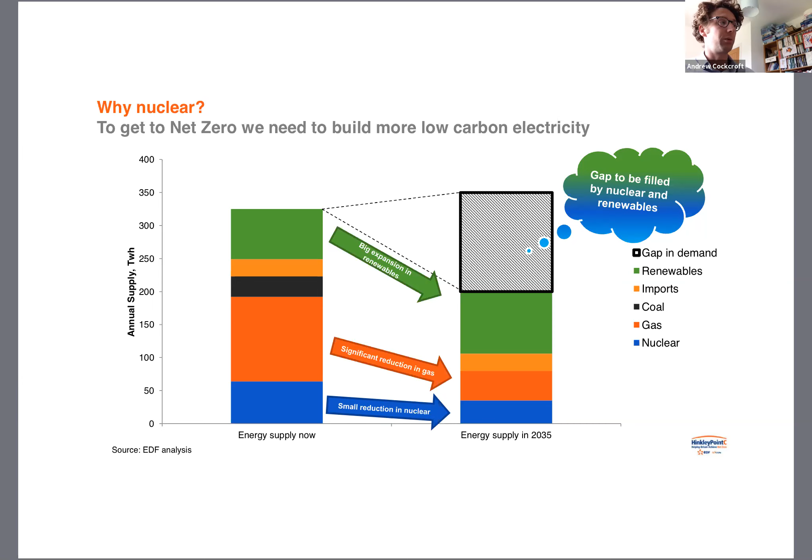So Howard, if you could just jump to the next slide for me, please, just to give you the basic grounding of Hinkley Point C before we get into the detail.

Hinkley Point C is the first of a set of planned new nuclear power stations for the UK. For us as EDF, we have Hinkley Point C down in Somerset under construction. We're also working with government on proposals for Sizewell C in Suffolk, and also working with our partners CGN to develop an additional station over in Bradwell.

Hinkley Point C in isolation, once operational in 2025, will provide energy for 7% of the UK, which can translate down to around 6 million homes. So a substantial amount, and thinking back to that first graph we looked at, nuclear can meet that future energy demand.

We'll get onto this in slightly more detail further down the presentation, but especially in today's context, and for those of you in the construction and engineering sector, the value of major infrastructure projects, particularly these mega projects, and the value that they can provide to the UK economy, and also to people's skills development and jobs creation, shouldn't be underestimated.

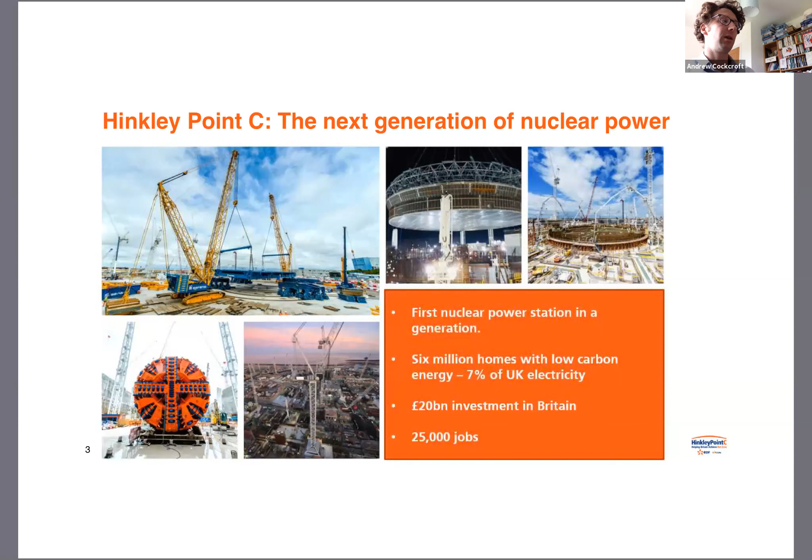Okay, so Howard, if you've just gone to slide 4, please. This is something we often talk about, Hinkley Point C, as just a generic power station, but I think it's often good to really understand what it is.

Hinkley Point C is what you'll hear termed an EPR reactor—that's almost like its brand name. There are various connotations, but you can think of that EPR acronym standing for either European or evolutionary pressurized water reactor. European because it is a European design, and evolutionary because it's not a new design, which I think is an important point to make.

The EPR design that we're building at Hinkley Point C is not fundamentally new. It's built from hundreds and thousands of reactor years of operation across other European designs, and what it does is build upon those—taking the best efficiency measures from some, the best safety measures from others, and building it together to create the Hinkley Point C EPR, or UK EPR as it's now known. Fundamentally, the EPR reactor is more efficient than previous designs, so it uses less uranium.

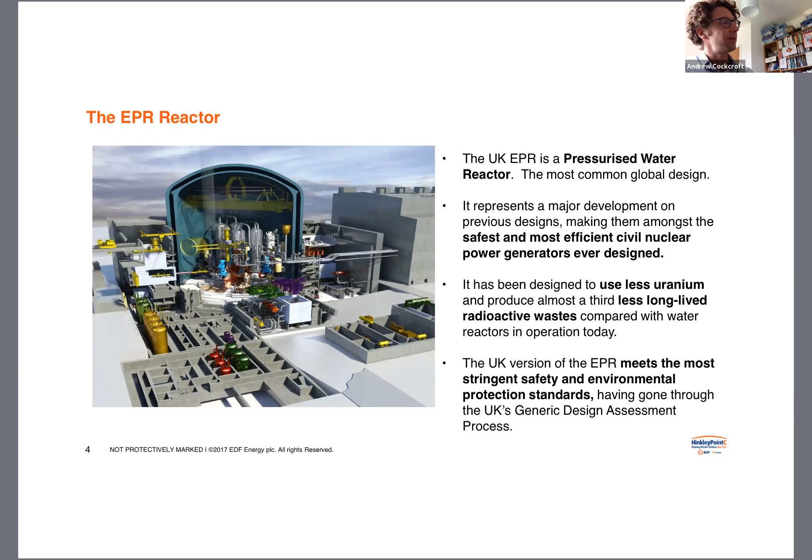This is the schematic of Hinkley Point C, just the single reactor, but it will give you an idea of what the final power station will look like. I should reinforce that Hinkley Point C is two reactors - you're just seeing one here. So Hinkley will have two, side by side, two reactor buildings, which is where all of the reactor core is situated - we call that the nuclear island. Just in front of that you have the turbine building, which we call the conventional island. That will make more sense in a second.

Out the front of the turbine building at Hinkley Point C is all of our cooling water infrastructure. We bring in cooling water from the Bristol Channel, and that's used to condense the water from the turbines in a way very similar to any other conventional power station. That's a general point actually - people often think nuclear is very different, and it is different in the way we generate heat, but the basic principles of generating heat to boil water, make steam, turn a turbine, and allow a generator to produce energy is exactly the same in a nuclear power station as it would be in coal or gas.

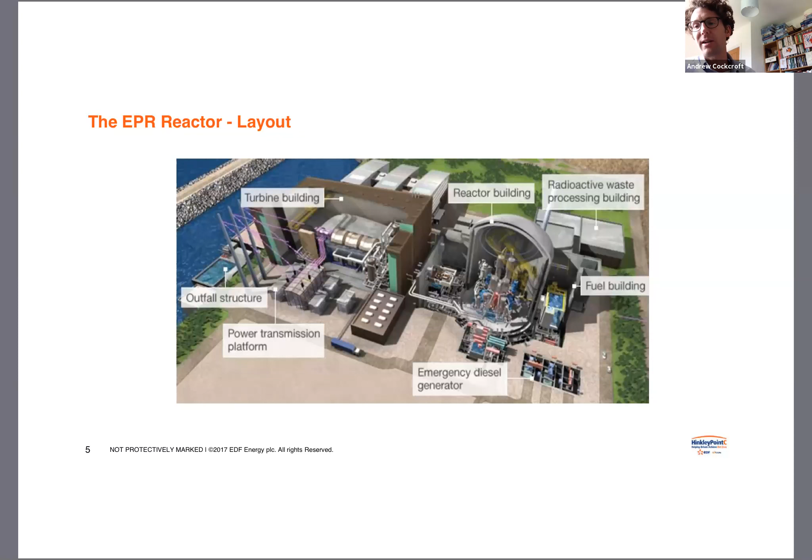So that's your basics in reactor setup and operation. So how's this actually being translated to Hinkley Point C on the ground? Howard, if you go to slide 6 please, this will give you a satellite image of Hinkley Point C, and this is a satellite image from last month.

There's a lot going on - you'll be able to see a lot of detail, and I've picked out some key areas to show you. Building from that last slide, if you remember back to that basic CGI schematic, those circular areas designated Unit 1 and Unit 2 are the nuclear island I mentioned, and that's where the core of the reactor will be situated. So that's really your nuclear area.

In front of that is your two turbine halls for both Unit 1 and Unit 2. You can see, particularly on Unit 1, we're making good progress on the conventional side of the power station now. And then in front of that you'll see the latest on where we are with cooling water infrastructure and our tunnelling. Obviously the tunnels are completely invisible to the naked eye, but shouldn't be discounted as a major piece of engineering work that's hidden from view.

Other elements I'd like to point out - you'll see just to the 7 o'clock mark on the Unit 1 box, a yellow and blue structure. That's the location of Big Carl. Big Carl is the world's largest crane, which we have at Hinkley Point C. It has the capacity to lift thousands of tons - we won't actually be going near its full capacity - and it's around 280 meters tall.

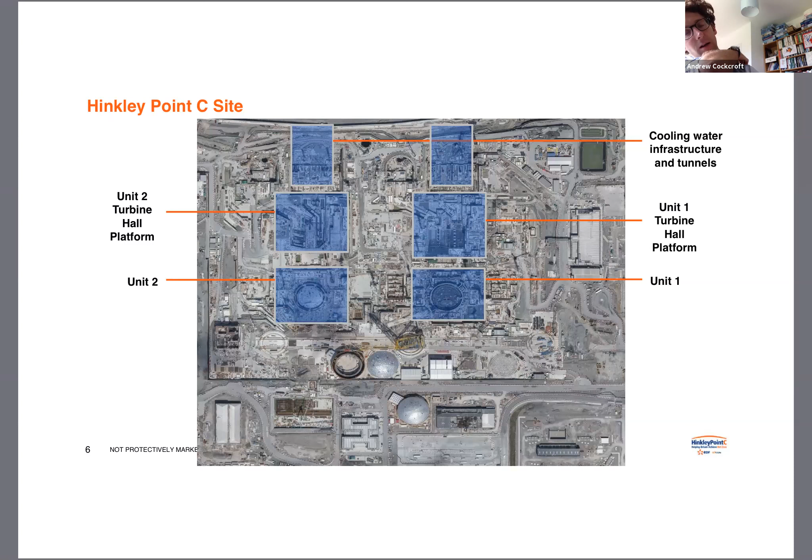If we go on to the next slide please, which is just a summary of where we are. So we're progressing very well.

During 2019, all of our project goals were completed on time. We started the tunnelling work, we completed the reactor base for Unit 1, the engineering for the inner containment has all been completed, and manufacturing for major pieces of internal equipment, such as the pressurizer, an essential part of the reactor nuclear steam supply system, have all been started. Moving into 2020, goal 1 and goal 2 were also completed, and particularly noteworthy is that those 2 goals were completed despite the challenges posed by coronavirus.

As with everyone, not even just the construction sector, that has posed a big challenge for us. We had to drastically reduce our workforce numbers to enable social distancing, and make a number of other changes to enable our workforce and the communities around us to maintain safety - COVID-19 safety, not just traditional construction safety, which is always there. That has posed some challenges, and we've had to concentrate our attentions on the critical path.

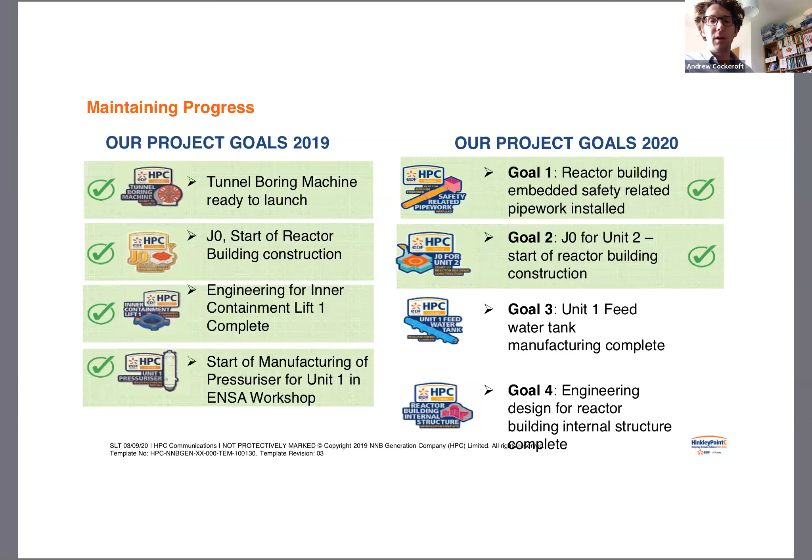It was a very proud moment when we were able to complete goal 2, the foundations for the 2nd unit, absolutely on schedule in June of this summer - particularly noteworthy as that was a date we put into the schedule over 4 years ago. So the project is on track. We're still ascertaining the impact of COVID-19 on our schedules, but we're doing our best to keep things moving as best we can.

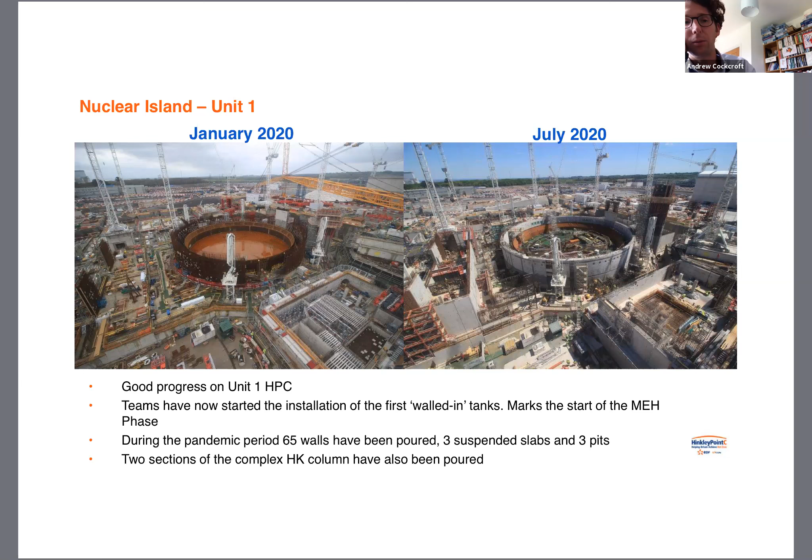Next slide please, and we'll go to Unit 2. Unit 2, as I said, is around about 12 months behind Unit 1, and that stagger is intentional. It allows efficiency because it allows workforce from Unit 1 to gain the learnings and move across to Unit 2 and make it quicker. That's something we're seeing time and time again, actually.

We've actually had moments when we've had to hold Unit 2 back a little bit in order to maintain some separation, because Unit 2, on multiple metrics, is doing things faster, safer, and more efficiently than Unit 1. This learning point is really vital for constructing excellence, and for me personally it's about how those learnings can be shared more broadly across the industry, and how we can gain from any advice on efficiencies, safety, and all the other big metrics we need.

In summary, Unit 2 is also progressing well after the completion of its reactor base in June. Next slide please, Howard.

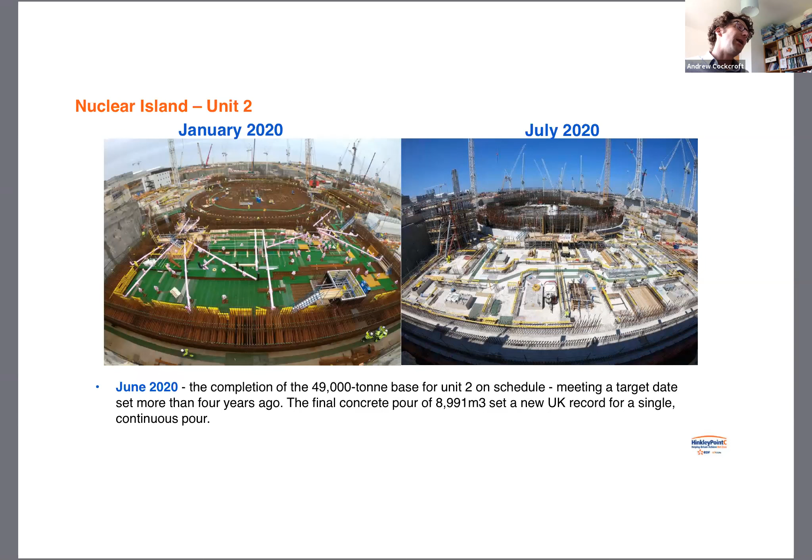This shows very recent progress. As I said, you've got different aspects of the power station — you have your nuclear island, and you also have your conventional island. The conventional island is really where the magic comes to life, where the electricity is actually generated by the turbines and out onto the national grid.

We're seeing the completion of the basic foundations for that platform, and only a month or so ago we saw the installation of the TG columns. These are very large steel columns, manufactured just over the water from us in Wales. There are 15 of those in total, 17 meters high, 40 tons per unit, and they will support the turbines in due course.

And this being Hinkley, those turbines are also the largest single shaft turbines in the world, and the most powerful that you can get. Just worth reinforcing as well, I was talking to the teams on site, and these TG columns will be supporting concrete support platforms which themselves are hundreds of tons. So, as with the reactor buildings, we'll be seeing this conventional island platform growing up in the future.

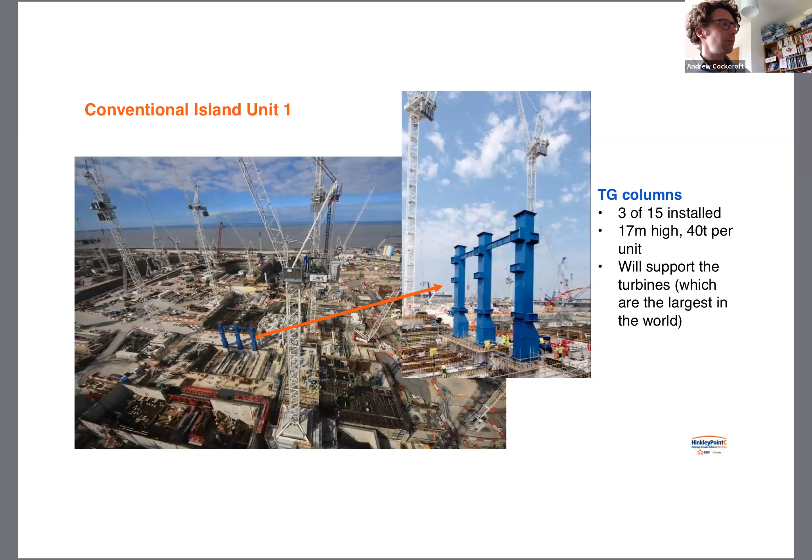Okay, Howard, next slide please, if that's all right.

Now, a hidden piece of progress — not visible, but the cooling water infrastructure required for Hinkley Point C is substantial, and we actually need to excavate 3 separate tunnels: 2 inlet tunnels for the reactors and 1 single outlet structure. To do that, we have 3 tunnel boring machines now out in operation, or just about ready to start digging.

The most advanced tunnel is the inlet tunnel for Unit 1, and that's currently 2 kilometres out under the Bristol Channel as of today, out of a total distance of just over 3 kilometres. So over 2/3 of the way now to completing that first tunnel for Unit 1.

Talking about significant milestones, those tunnelling teams are working very effectively — they've gone 3 years without a lost time incident now. Although they haven't completed their formal engineering milestone just yet, which isn't scheduled until towards the end of this year, it's worth giving them some kudos — the teams on the tunnelling are doing very well indeed to keep that on track.

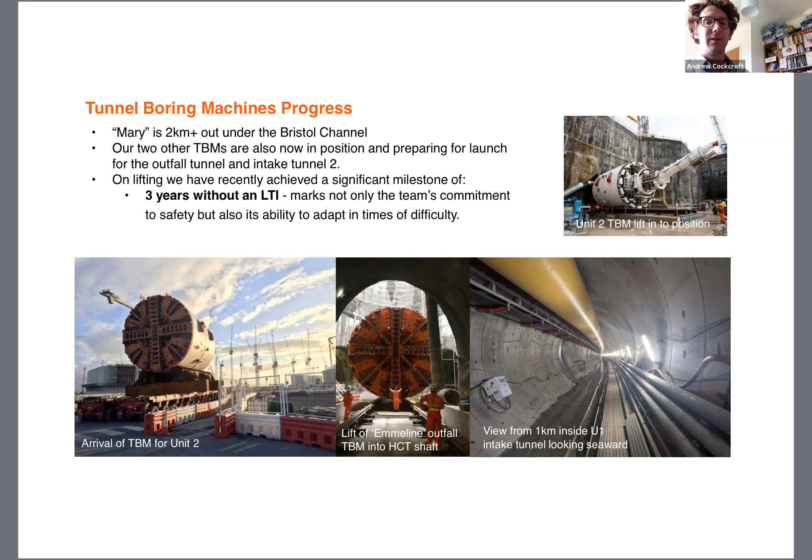Okay, next slide please, Howard. A very visually exciting one, and our latest milestone, completed only in the early hours of Sunday morning — good to give you this update — was the lift of Unit 2's liner cup.

This is a good example of the use of Big Carl, that enormous crane we have. The liner cup is really the base for the reactor itself, and it's 170 tons. It's lifted over a period of sort of — well, the last lift was 7 hours in total — and you can see this structure being lifted out of those prefabrication buildings that I mentioned when looking at the site map, and put on top of the reactor base for Unit 2.

Talking about learnings, the liner cup for Unit 2 was completed 30% quicker than the identical part on Unit 1, which is just an example of how those prefabrication buildings can really help. It enables all of the complex welding to be done in a nice weather-tight environment, so it helps quality, helps safety, and helps efficiency.

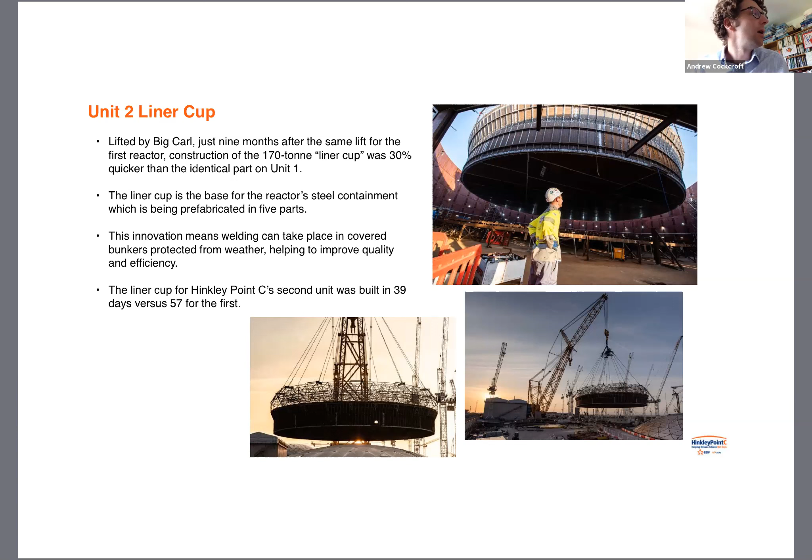Lovely, Howard, the next one please, just to build on this efficiency piece. There are two elements to efficiency, and I said this is very important to our project.

Firstly, we learn from experience of constructing other EPRs around the world, notably the EPR now in operation in Taishan, China, and also at Hinkley Point C's sister station in Flamanville, France. Many of you will know Flamanville is behind schedule, and that's accepted. If there's a benefit, it's that we know we're not going to make the errors that led to those delays, so we can take that learning across to Hinkley Point C - that's a very active process we're taking on.

We can also learn from the nuclear industry as a whole - it doesn't always have to be an EPR reactor. There's a lot of nuclear construction ongoing around the world, and we're always out there learning to take those examples and improve.

But something we've seen a bit closer to home, worth referencing, is how we can take the learnings from Unit 1 to Unit 2. I've spoken about the liner cup, but it really counts for everything - there's a lot of repetition involved in the construction of Hinkley Point C, and we can look to these examples by way of the big numbers here.

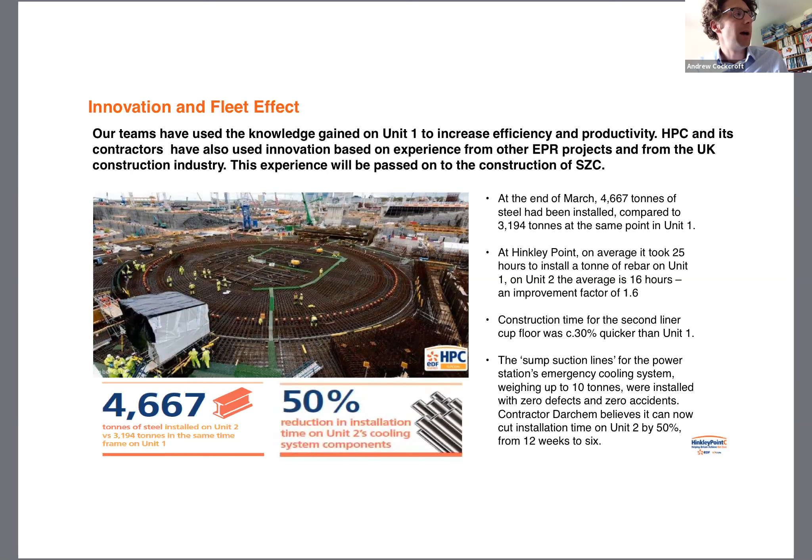Okay Howard, next slide please. Coronavirus - I thought it would be worth touching on this because it has been a challenge, and for us as a construction site particularly so.

At the start of the pandemic, we were designated as a nationally important infrastructure project, so we were able to continue operations, but it was far from business as usual. We reduced our construction workforce by around half - into the March-April period, we were down to only about 2,500 people on site.

We then moved from there to introducing a huge range of measures, which you'll see on the slide, to protect the workforce and community going forward. We're using those protection measures and understanding how we can maintain social distancing, whether on the logistical side and transport, or how we operate our canteens. You can see the quite bleak but effective way people are segregated in the canteens now.

We're working to build the workforce back up to a higher level. We're still not back to where we were, and we don't expect to be back there anytime soon, but currently our workforce is around 4,500 people on site in a 24-hour period - below pre-pandemic levels.

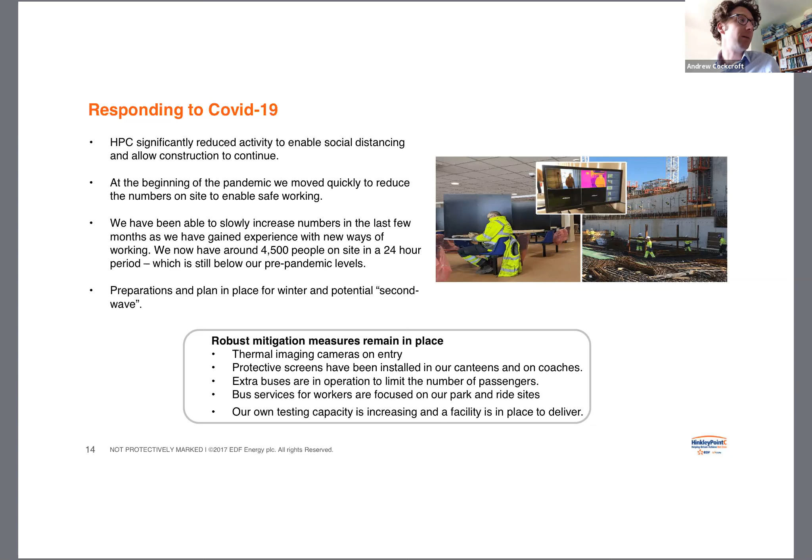Building on that, I made a comment at the outset about the benefit a major infrastructure project can provide. At Hinkley, this is very important for us. We have a long project, with a build time of around 10 years, but then we'll be operating in the Southwest for potentially over 60 years.

So it's very important that we, one, enable the opportunities of the project now to be opened up to people across the Southwest and the UK as a whole. But secondly, how we continue the legacy of that as we move into operation, how we continue to overcome nationally significant skills gaps, improve social mobility within the area we work, and support our local supply chain as they move into the wider sectors of nuclear and construction in general.

Looking at the figures, the impact is large and growing. At the macro level, we expect 64% of the value of construction to go to UK-based companies. As Andrew and the team at Constructing Excellence Southwest will know, we have a strong focus on ensuring that at the local and regional level we're supporting businesses to enter the nuclear supply chain, helping them understand the subtleties of entering an industry that can feel daunting given the quality and safety requirements.

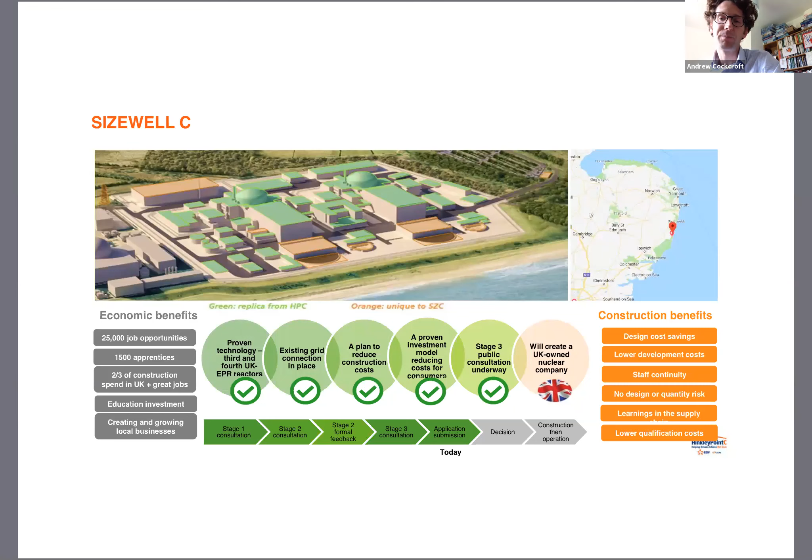So that's it. I'm sorry, I've had to rattle through quite a bit there. I hope that's a good synopsis - we often wish we had more time, but it's good to open up for questions if people have them.

Thank you very much, Andrew, very interesting indeed. I've got a couple of questions in the Q&A box, and one that's come in through the chat, so I'll take the chat one first: how have your contracts dealt with COVID, for example in terms of allowing time and or money to contractors?

I can't speak for specific contracts in answer to that question, but we've been very clear that we want to support our supply chain. In broad terms we've been very supportive of businesses within the supply chain who are struggling - we've seen factory closures throughout our supply chain in the UK and abroad. It's not the case that we're digging in contractually with our supply chain demanding they open again. Far from it - I think this is a partnership we're working on together. Hinkley is one team, and the pandemic is a global challenge without precedent. So I can't speak for particular contracts, but in broad terms it's been one of support and collaboration to get us through.